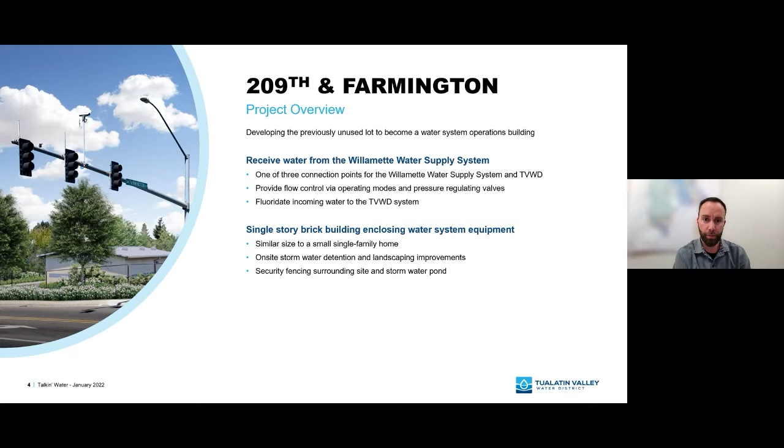...was to have a connection point to the Willamette water supply system, which comes in at a higher pressure than the TVWD system. We needed a way to break that pressure, but we also had to provide fluoride injection, as TVWD has a water system for this part of our district that has fluoride in it. To do that, we like to keep our facilities above ground so they're very safe and easy to operate. We were going to end up with a single-story brick building that's got most of our equipment enclosed in it, where it's protected from the elements.

And with that, Justin, I'll go ahead and hand it over to you. Thanks, Andrew. So yeah, like Tom and Andrew said, this project - as you can see a little rendering there on the left side of the screen - as we go through today's slides, we're going to start at a really high level overview and work our way down to more structured details of what this project and its construction will look like. So kind of follow along a little bit of a story with us today.

We'll be developing a previously unused lot to become a water system operations building. Primary goal, first and foremost, is to receive incoming water from the future Willamette water supply system. This site will end up being one of 3 connection points between the Willamette water supply system and TVWD's distribution system. It will provide flow control via operating modes and valving to adjust the amount of water we take from the Willamette water system to meet daily needs for our customers, and as that need changes seasonally, annually, over long periods of time, this is the real operations center where that water adjustment will occur. Also, we'll be fluoridating the incoming water as it enters TVWD's distribution system.

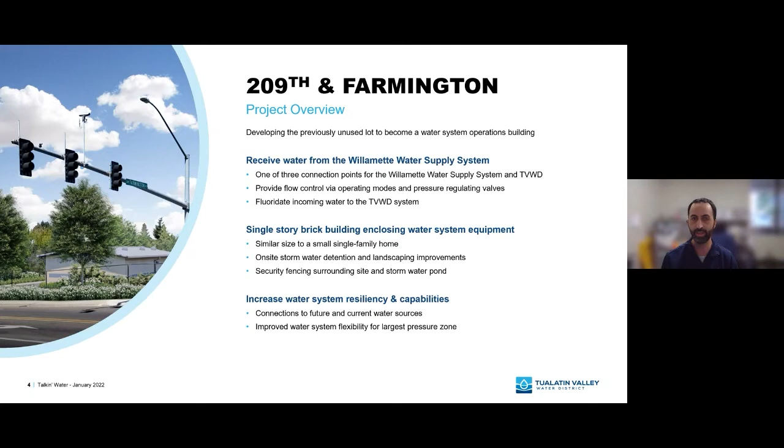A little bit of background about how we got to 209th and Farmington as the location for this project.

And on the left side, you can see another aerial rendering of what the project will look like once it's done. So this is approximately an $8 million investment in the water system.

It's fully funded from regular water bills. We always like to point out when our projects are like that, and the vast majority of our projects are coming from the money that you and your fellow customers at TVWD pay every other month to your water bill. That money gets invested right back into the water system, into projects just like this.

The early project plan included a much more in-depth project. It was having a pump station and a lot of off-site water main piping all the way up to the summit of Cooper Mountain. And as Tom had alluded to earlier, there were a lot of cost escalations. We ended up pausing our design, and the cost for this project had nearly doubled from the original budget estimates.

At that point, in the best interests of financial management and our customers' money that you paid in those water bills, we decided to do a full reevaluation and a scope reduction to really trim this project down to the essential needs to connect to the Willamette water supply, as that is the single most important thing about the 209th and Farmington site.

Now that leaves us in a place where we do frankly need to continue working on the Cooper Mountain water system improvements. Right now, we have a single means to get water to the summit of Cooper Mountain, and that single pathway needs upgrades. So the current reservoirs and the pump stations that move that water from the valley floor up to the top of Cooper Mountain can't be updated or improved and solidified until we have that second source of water to get that water from the valley floor all the way to the top.

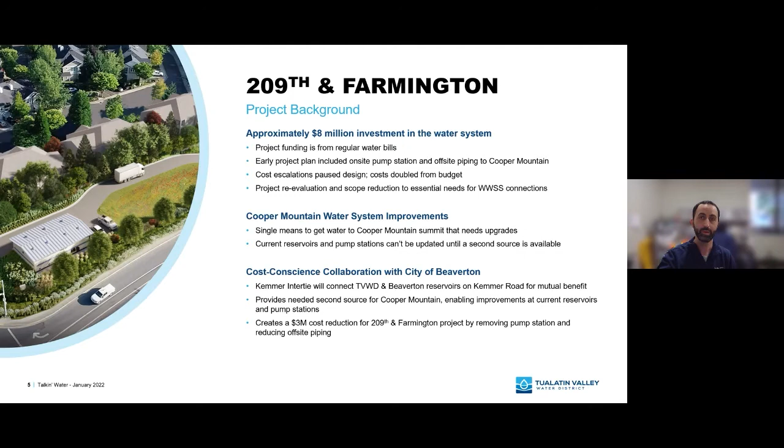So I'm going to pass this back over to Andrew to talk a little bit more about exactly where in the district we are and what we're going to be doing. Thanks, Justin. So yeah, as Justin mentioned, I'll be pointing out some maps, some of the locations, and some of the options that we had for reducing some of the scope and the price of this project.

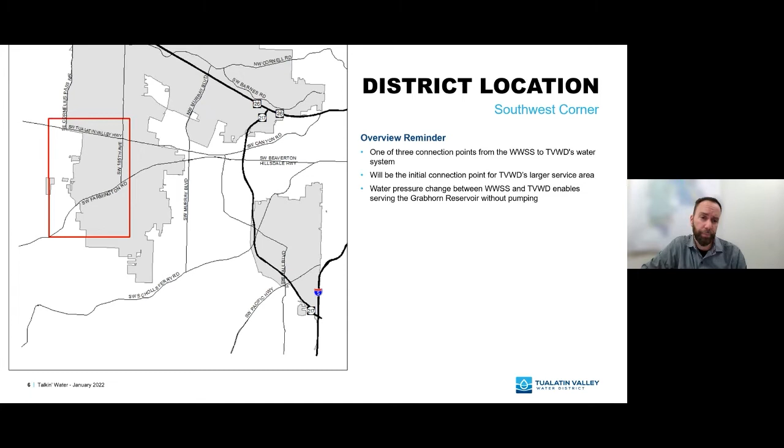When we initially developed the scope for the Farmington pump station project, we were going to try to do as much as we could at that facility to save the district money and make the best use of district facilities, including land and also dollars, to get the most bang for our buck. So what we were trying to do was, one, have that important connection to the Willamette water supply system, have the fluoride injection. Because, as Justin mentioned, we knew that we wanted a second resilient connection to the top of Cooper Mountain via pumping, put a pump station there.

We were looking to have a PRV to allow higher pressure from the Willamette directly connect to the TVWD system at a lower pressure. But we also wanted the ability to pass through some of that higher pressure to an ASR that's at the same location as the Grabhorn Reservoir. Unfortunately, the Grabhorn ASR is like 20 to 30 feet higher than the overflow for the Grabhorn Reservoir, which means that the standard pressure we have essentially will not be able to push water in there. So that's a tall order for one facility to do, but that was our initial goal.

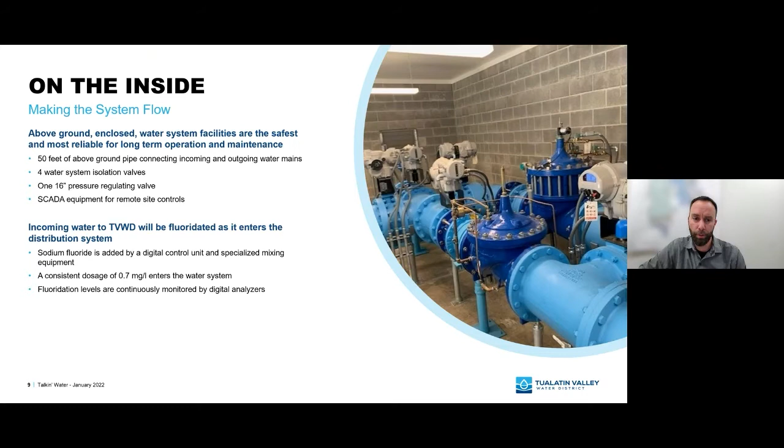So inside the facility, we also have SCADA controls. We'll have the fluoride injection that we monitor and dose very carefully to make sure we're meeting our regulatory requirements. So next slide, and I think this is back to you, Justin.

Yeah, absolutely. Thanks, Andrew. So with this project, we've been talking a little bit about the need for off-site water mains to connect the actual physical location in the Willamette connection into the TVWD distribution system. Back in November, we started installing those off-site water mains. We've been really successful working with our contractor, getting those nearly finished right now. So we've got a 16 and a 24-inch new water mains that go across Farmington Road, and they connect to existing water mains that serve the larger Farmington Road area.

And we installed a new 24-inch main up Grabhorn Road to Leland Drive. Leland, because it's a kind of small residential street, is directly across from the Jennings Estate that THPRD manages there. We didn't have to go any further than that because we had an existing 24-inch water main installed under Leland Drive in 2018. Andrew was part of that project team to replace the Grabhorn Reservoir just up the hill there. At that point, we had anticipated this project would be coming in a short time frame and installed the 24-inch water main under Leland Drive, capped and ready to meet with this new main that went up Grabhorn, really able to reduce the construction impact on that neighborhood.

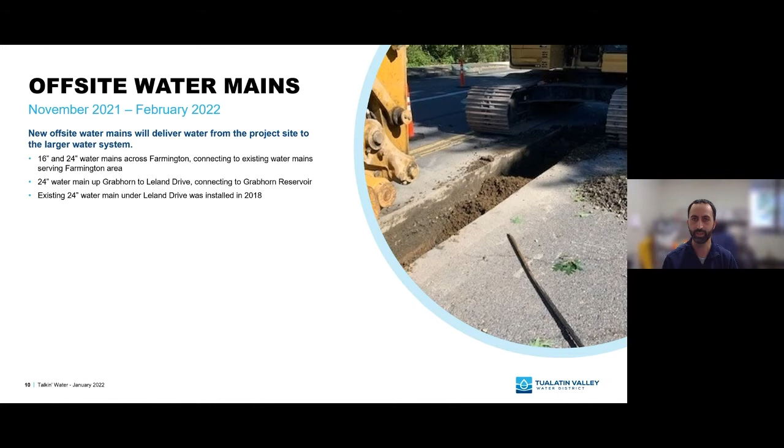It is a fairly standard, quiet residential street, and we didn't want to go disturbing it and tearing it up again twice in such a short time span.

Current status of the offsite water mains is really close to complete, 97% almost done. We've been doing pressure testing and disinfection, which was completed just last week, and the new water mains are connected to the water system. We'll be waiting on that last bit for permanent road restoration this spring, definitely weather dependent. Road paving in Oregon can be tricky sometimes, need 45 degrees, dry and warming temperatures, which is not often a long or really wide window for us here in Oregon.

One thing we always like to talk about is what's it like to be a neighbor of TVWD. So in full transparency, developing our sites from the way they look now, vacant, unused field, into what they're going to become really is the most impactful stage of being a neighbor with us. Once our sites are commissioned and running and going through daily operations, we tend to be pretty proud that we're a good neighbor. We try our best.

What that looks like on a typical activity is water operator site visits. Every day, 365 days a year, a certified water operator will conduct a daily required inspection of the operations building. That is required by OHA because this is a facility that will be adding fluoride to the water system. So this is typically 1 or 2 operators, often even just a single regular pickup truck. This is something we do often without any other notice because it is such a quiet operation. An operator will get into the site, enter the building, do their inspections, make their notes, file their report, and go about the rest of their daily rounds.

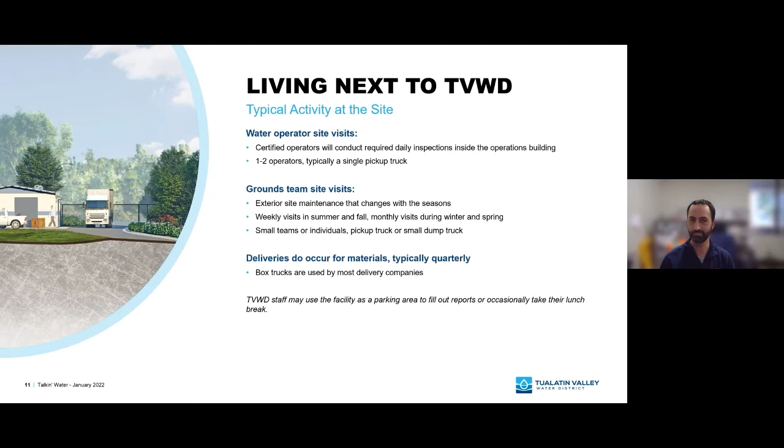One note we often like to point out is the TVWD field staff may use this facility as a parking area to fill out reports or occasionally take a lunch break. We do have a lot of field staff, and they often are working outdoors in the elements every day. So if there is a TVWD facility nearby where their work site is or where their rounds are for the day, they are encouraged to go ahead and use that parking pad to get out of the field, out of the rain, and file their reports in a safe place, eat a lunch if they need to, that kind of stuff. So you will see TVWD staff around the site every day, but we're real quiet, and we tend to just do our work and go about our business.

I'm sure this is what everyone's been looking forward to knowing: the construction schedule. And right off the bat, we'll just go ahead and say it: this is estimated. We do expect changes and refinements to this. Now's a great time to plug our website to sign up for email updates, which is where we'll be announcing those schedule changes and those refinements.

Moving from left to right, first stage is going to be site prep and a lot of earthwork. We're estimating about 2 months of this after permits are issued, and this is going to be a pretty impactful section of the project. Large equipment making noise and vibration is to be expected, and this is because we'll be bringing the project site grade up to closely match the roadways. If you were to go for a walk right now near that intersection of 209th and Farmington, you would notice that our project site really dips down a bit from the sidewalk level. So we're going to bring up that grade closer to match the roadways.

In the middle there, building construction and on-site piping. This is definitely the most interactive section of the project, about 10 months, with a bulk of our work ranging from on-site piping, bringing in all the off-site water mains, setting up everything inside the building, all the way through electrical, security, and all sorts of stuff.

The local impact right around the project location will change based on the current work, which also means this is when we will send our most frequent project updates about what to expect and when to expect it, if you live or travel near and around this location.

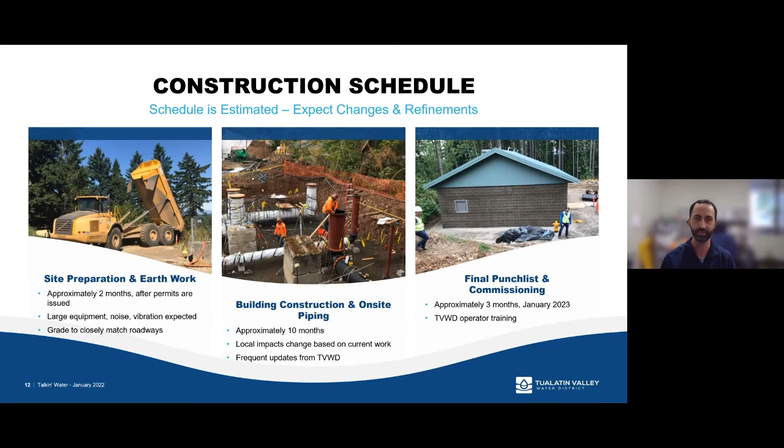As we wrap up today, we definitely want to offer some ways for everyone to keep in touch with us, especially because for those of you who live near the site, we will be your neighbor here soon.

The project website is tvwd.org/Farmington. We've got project information in there, a virtual open house, you can sign up for email updates, and all the renderings that you saw in today's presentation are there in full screen, so you can check those out as well.

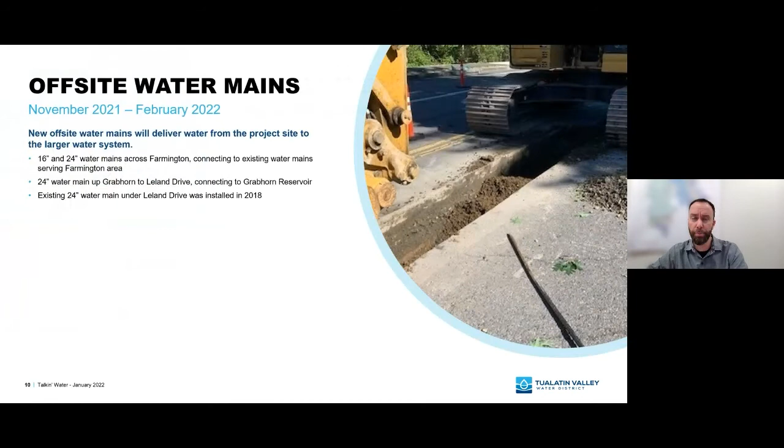The next question is kind of a similar type. This person is anonymous, but they want to know what sorts of things were cut out of the project to reduce the cost, and whether any of those cut items will come back later at a greater cost. The big ticket items that were cut out were the pump station, the actual pumps, the pump headers, and the discharge main for the pumps. The building was also reduced in size. We decided that if for whatever reason, 50 or 100 years from now we have to build this facility—which we're not planning on doing—we did keep as much of the original layout as we could to ensure a retrofit could be done on that site. But those are the big ticket items essentially being removed from the project.

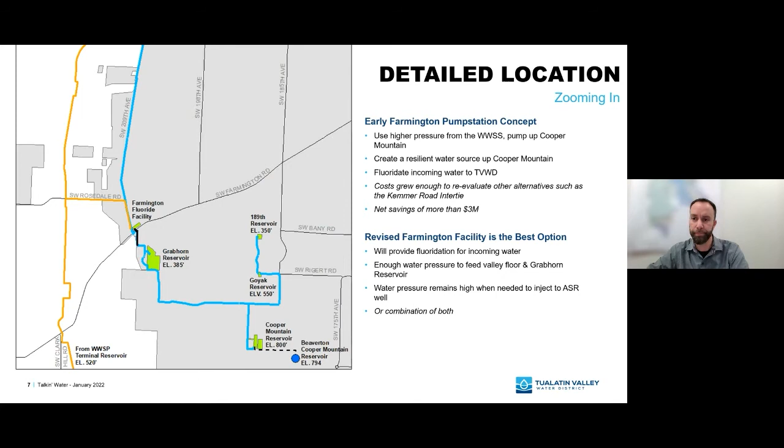Andrew, if I could weigh in on it. One of the things we do all the time is after we come up with a project, we specify its goals. Then as we go through the design process, we're constantly evaluating whether or not the project is meeting those goals, correct?

One of the things I think answers the question is that while changes were made and cuts were made, we still are achieving all of the goals laid out for the intent of the project. That's something we do as standard practice, defining the project objectives, and it's how we keep things like scope creep from blowing up on us, as we come back and look at those objectives and ask are we still meeting these, and are there other ways to meet these? That's exactly what Andrew and his team did, and it resulted in cuts, but it was a very positive story, not in the sense of cutting and having to pay for it in some painful way by sacrificing what we were trying to achieve.

Are there any other experts who want to weigh in on this question before we move on?

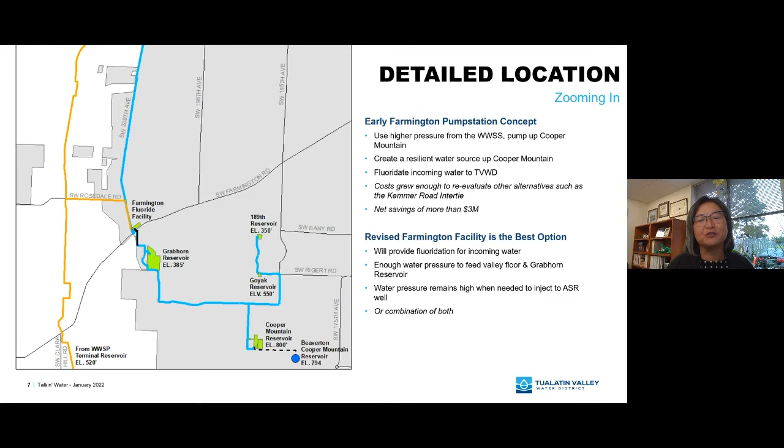Thanks, Andrew. Tom, if I could just add something real quick to Tom's response. You might recall when Tom started this presentation, this project was actually budgeted for about $10 million. As the project moved forward, we saw a significant increase in the estimate we were seeking. That's one of the reasons we took a step back and did value engineering, trying to figure out exactly how to bring the project back into the original budget. So while there has been cost savings, there really isn't that big of a savings per se, because we just brought it to where it was supposed to be, not where it could have been.

So just wanted to add that.

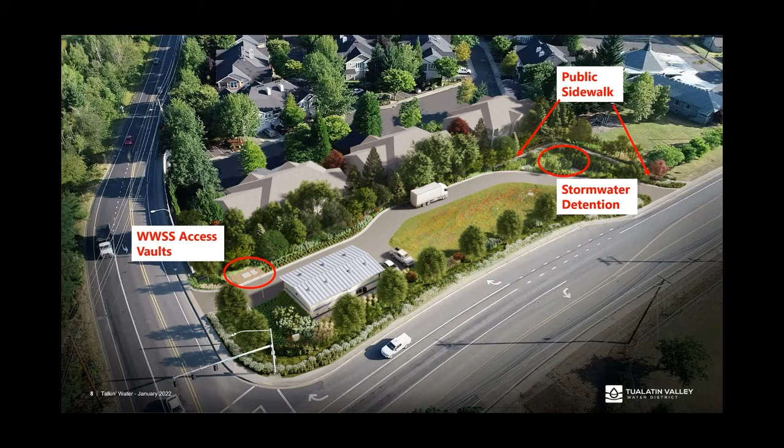The question about the Miller Hill ASR: Miller Hill is our second aquifer storage and recovery facility, in addition to the Grabhorn site that's very near this particular project. On the map, it's near the south end, the bottom of that graph—near the top of Cooper Mountain, located, as you might guess, on Miller Hill Road. It is connected to the water system, but not currently online. We expect to bring it online in the next couple of years, and that'll give us another source of supply up here on Cooper Mountain, which is a really critical part of our system—a great spot to produce water and send it to our customers.

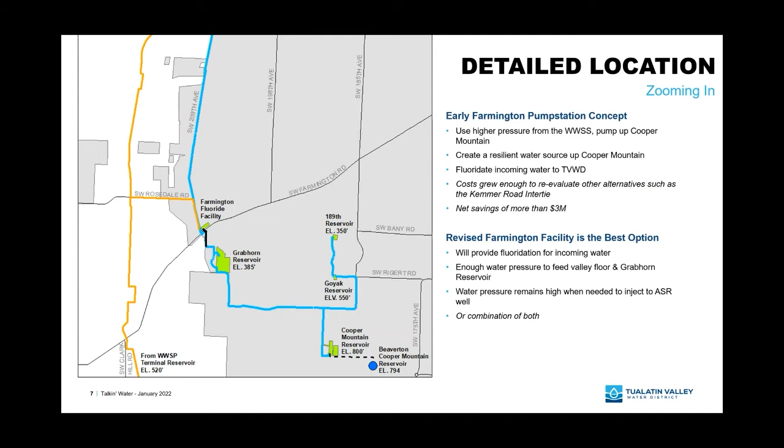Thanks, Pete. The next question is, will we see any changes in our current water pressure once this system is fully operational? I'll go to Peter Andrew on this one.

Thanks, Andrea, I'll take this one. No, you will not see any change in water pressure.

Wow, that was fast. Okay, the next question is, what are the primary costs in the lifetime of a facility like this? Is it upfront in construction? We'll elaborate on that and clarify that we want to answer this in regards to life cycle versus capital. If that's not exactly what you meant, put some more detail in the chat and we'll tackle that. But we think that's the essence of your question.

I'll take a stab at it. The primary costs essentially on this are going to be capital. There are some life cycle costs with any facility that requires operators to go out every day and see what's happening in the facility. There are also components that need to be changed out, like water quality analyzers, just to check that water quality is within the acceptable range. There are some components out there, but they're relatively minimal compared to the upfront capital cost. I'll open the floor to anyone who wants to correct, clarify, or add.

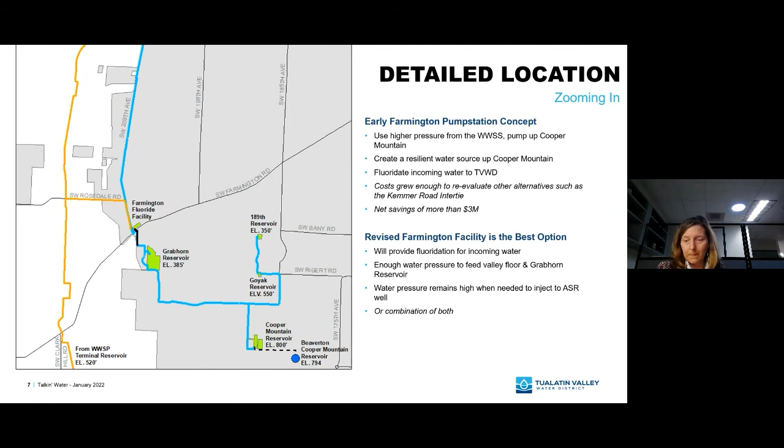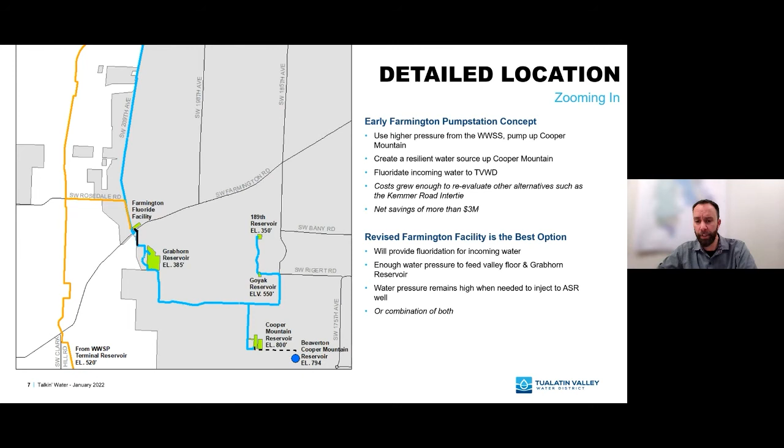I'll handle this one. The site will essentially be fully enclosed, including the detention pond. There is an exception that the walking path will essentially not have a fence across it because that would defeat the purpose. But we are going to enclose the storm detention pond, and it will be a black vinyl clad chain link fence. So chain link fence that is black rather than a shiny galvanized fence.

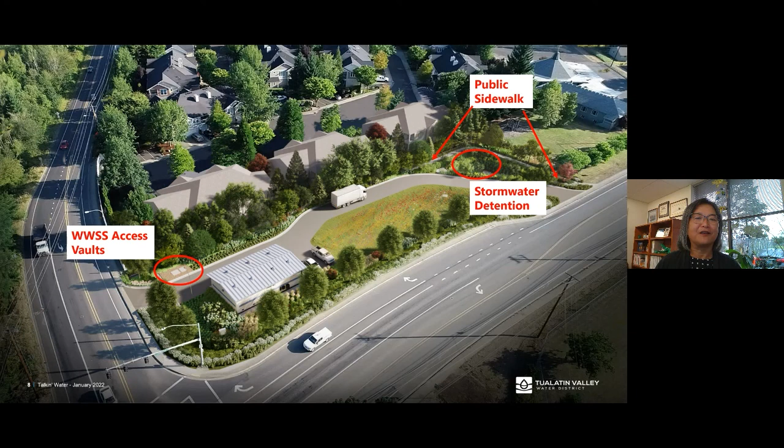It may be a little bit different, but it won't be to the point of being unsafe. I just wanted to make sure we meet expectations - we don't want to set the expectation that it's going to be exactly the same water, because it will be different.

Thank you for everyone who jumped in on that question. Tom, we have a tougher question for you at the end here - will the water prices increase?

I won't beat around the bush - yes, they will. Not as a result of this project specifically, but in large part we are seeing significant increases on the Willamette water supply project costs. As I mentioned before, labor costs associated with construction, as well as steel and concrete prices, have all driven up project elements far beyond what we had anticipated.

We are working with our board - one of our board members is on the call - looking at how we will pay for those increases. But the reality is we will have to increase rates in order to cover those costs.

We've given presentations on this before, and maybe we can do that again. But one of the things to remember right now is we're in a major investment cycle with the Willamette project and some other projects. During a major investment cycle, you see costs increase. We really do expect to see costs stabilize and our rates stabilize sometime after 2026, and we'll be in a much better position after that. But right now we're in the peak of a significant capital investment.